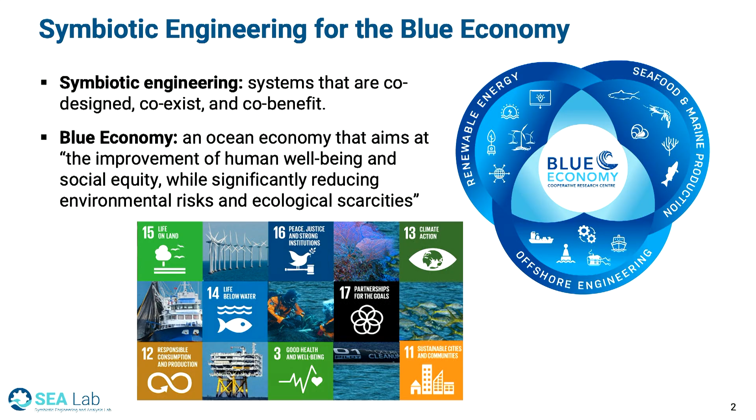From a research perspective, we take this and think about how can we co-design and optimize offshore systems to address a lot of these critical sustainability challenges. Specifically, we look at how can we harvest sustainable energy, how can we harvest water and food, and then also how can we design marine robots to support all of these systems.

And the motivation is clear. The ocean covers 70% of our planet, and it's rich in these resources, but it's a harsh, dynamic, and expensive environment to operate in. So to be sustainable, our systems must be multifunctional, resilient, and resource efficient.

And the challenges of all of these systems are similar. They must handle stochastic ocean waves. The waves change in frequency, amplitude, direction all the time. There's often a strong coupling between the physical design of the system and how you operate or control it. And you have to balance these competing goals, not just cost, but sustainability increasingly.

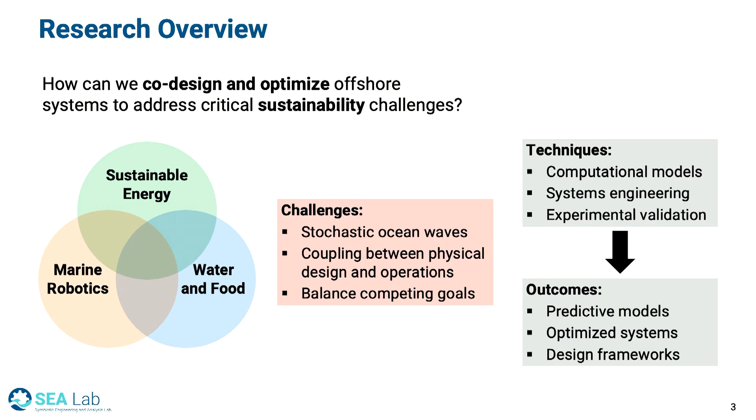So the challenges of all these systems are similar, and to overcome them, my group looks at how we can do that using computational models, systems engineering, as well as experimental validation. Our goal is to come up with predictive models, optimize systems, and more broadly, design frameworks that we can use for this new economy going forward.

One of the biggest challenges is that these offshore systems are really coupled. And what I mean by that, I'll use an example of a wave energy converter to talk about that. So these are two types of wave energy converters I'm showing here.

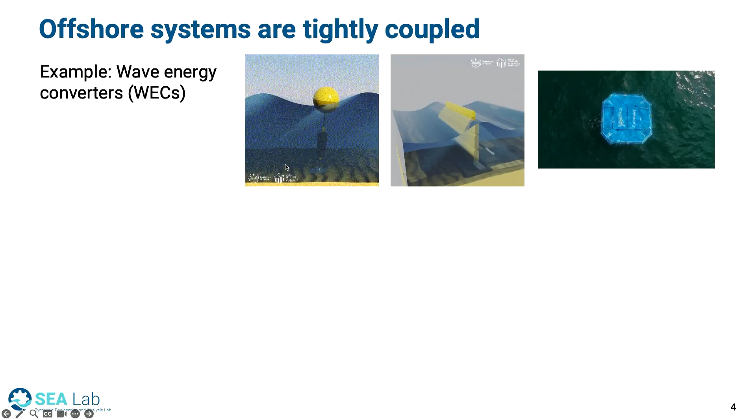The first one moves up and down in heave. It's known as a point absorber, and it extracts energy from that heave motion of the waves. The second one is an oscillating surge WEC. It extracts motion from pitching that occurs when the waves hit it. And the one all the way on the right, that's actually a point absorber that's been deployed in the ocean by a company called CalWave. So these things are actually being realized right now.

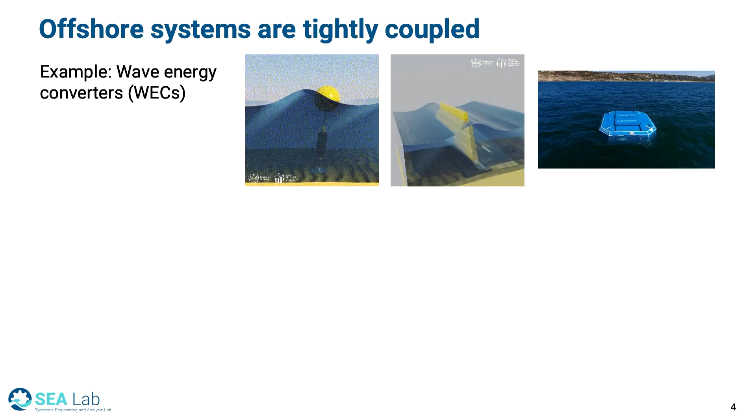Wave energy converters are extremely coupled systems. If we look at the different disciplines that go into a wave energy converter, we have things like its geometry, hydrodynamics, which is how it responds to ocean waves, its powertrain or PTO system, control, and structures. And all of these are tightly coupled.

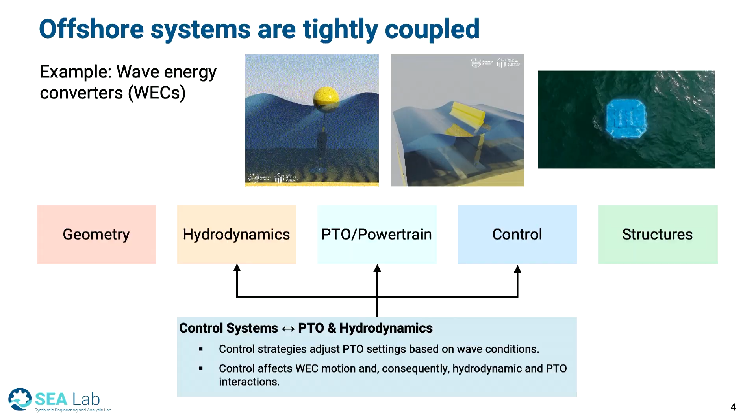For instance, the hydrodynamic performance is impacted by your choice of powertrain, because of the forces that the powertrain enacts on the energy converter, and the hydrodynamic response influences your powertrain's ability to extract energy efficiently. There's also a coupling between the control system and the PTO and the hydrodynamics, as well as the hydrodynamics and the structures that you need to now build to handle those ocean forces that you're undergoing. And finally, also the PTO forces need to be accounted for in your structures.

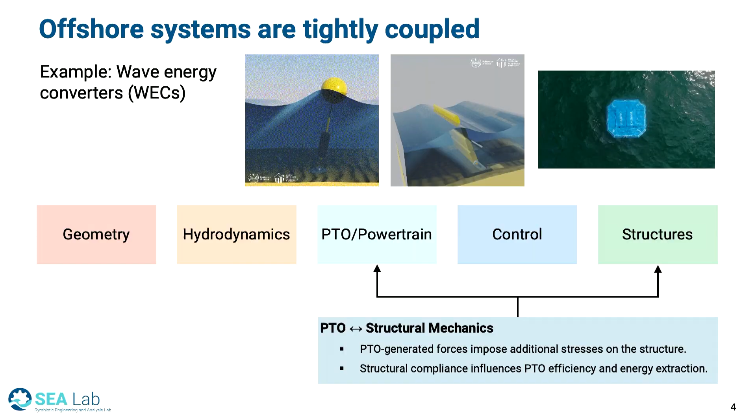Traditional WEC design took a very sequential approach. We might first consider the geometry of the system, then think about its hydrodynamic performance, look at how we design the structures to handle that hydrodynamics, slap on a generator to extract that energy, put a controller on at the end, all with the goal of maximizing power.

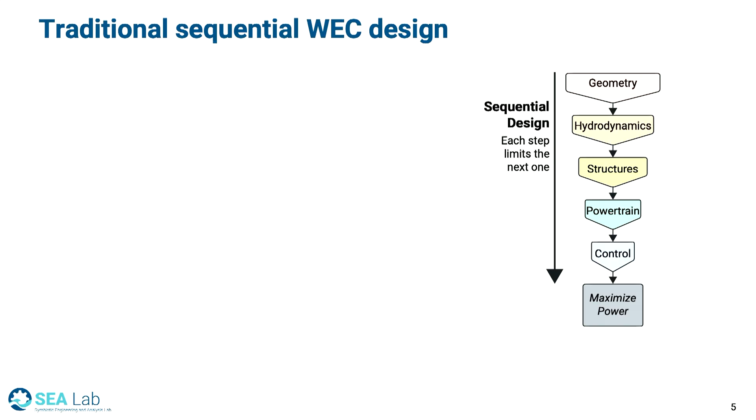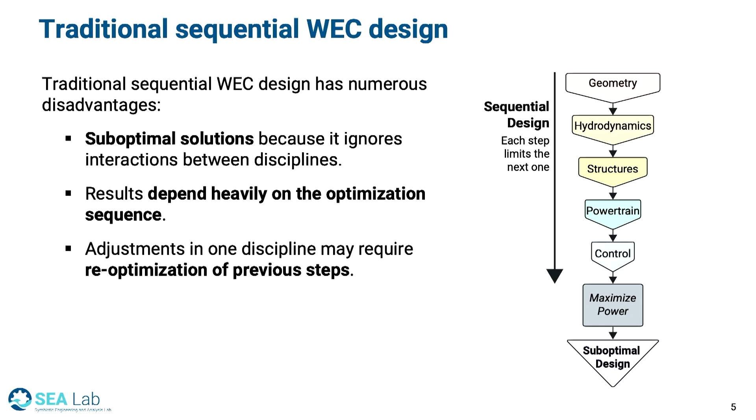But when we do this, the decisions made in a previous discipline limit our design choices in the next one. This causes us to reach suboptimal solutions because we ignore these interactions between disciplines, and the results depend heavily on the optimization sequence. Any adjustments we make in one discipline may require re-optimization. So it's very challenging in this way.

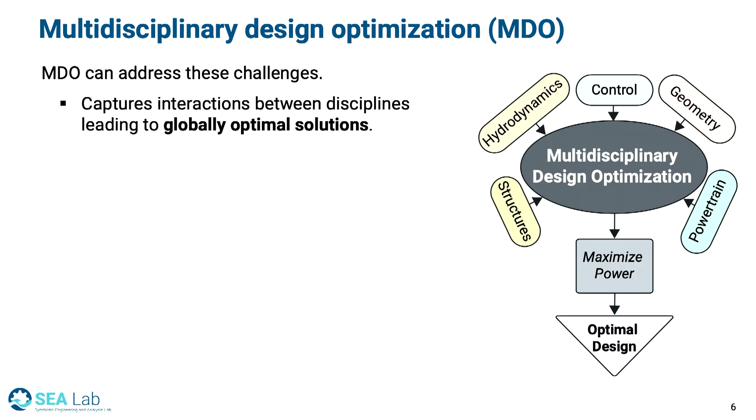In my group, we see multidisciplinary design optimization as a tool to address these challenges. Instead of considering the disciplines sequentially, we consider them simultaneously with the goal of, let's say, maximizing power. This allows us to capture the interactions between disciplines to get globally optimal solutions and reduce the need for iterative adjustments.

Another way to think about this mathematically: if you were to optimize for one discipline and then a second discipline, you might reach a local optimum for sequential design. But if you could view the entire design space simultaneously, you might get the MDO optimum, which is very different. We see this as a way to bring more design freedom into the design process earlier for longer. That's really our goal with MDO.

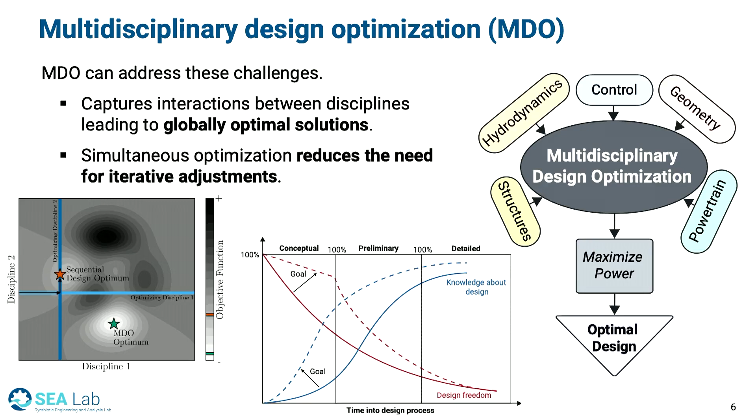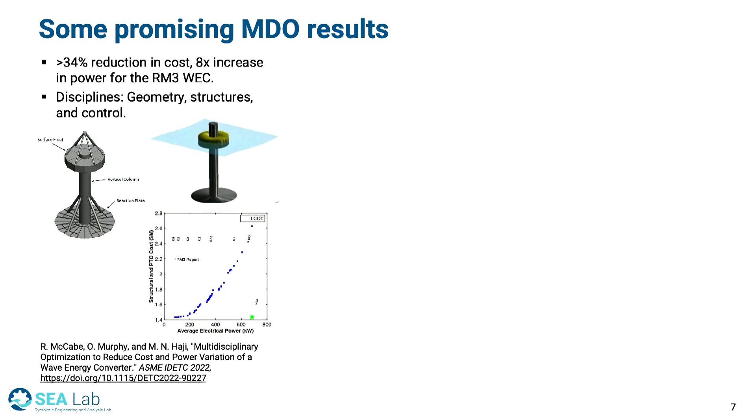We've had some promising results in our group trying to apply this to these ocean systems. We've done some work on the design of a single wave energy converter, and doing this, we reduced cost and increased power when we considered geometry, structures, and control simultaneously.

We've also looked at wave energy systems that can produce pressurized seawater for reverse osmosis. When we apply MDO, we can drastically reduce the cost of water produced by these systems when we consider hydrodynamics, system dynamics, desalination, and economics.

And we've even looked at how we might site these systems, specifically looking at wave-powered aquaculture systems. So now we bring in biology, the farm size, the wave energy converter, and location, and we can find optimal sites.

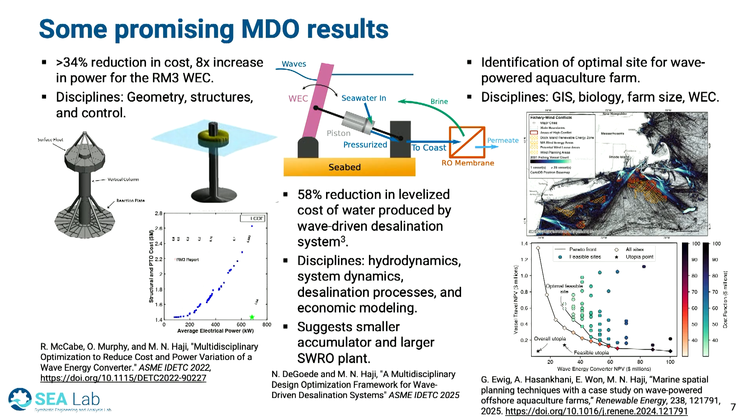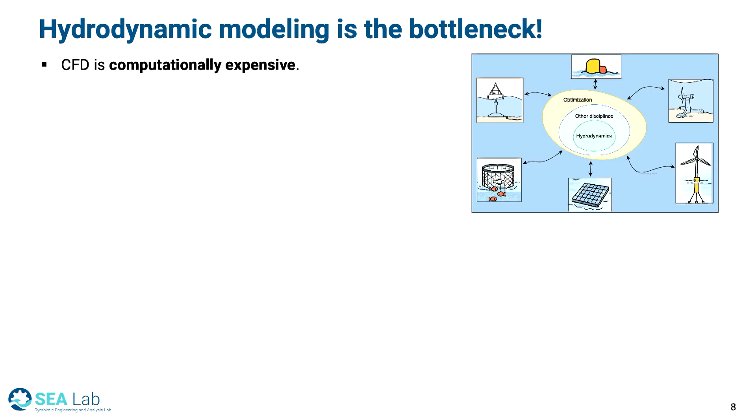But with all of these systems, we were finding that modeling the hydrodynamic performance was really the bottleneck for this kind of optimization. You can model the hydrodynamics using computational fluid dynamics, but that's very expensive computationally, so you would not try to do optimization that way, because design optimization requires running simulation hundreds or thousands of times, and that issue is compounded when you consider multiple disciplines as we do in MDO.

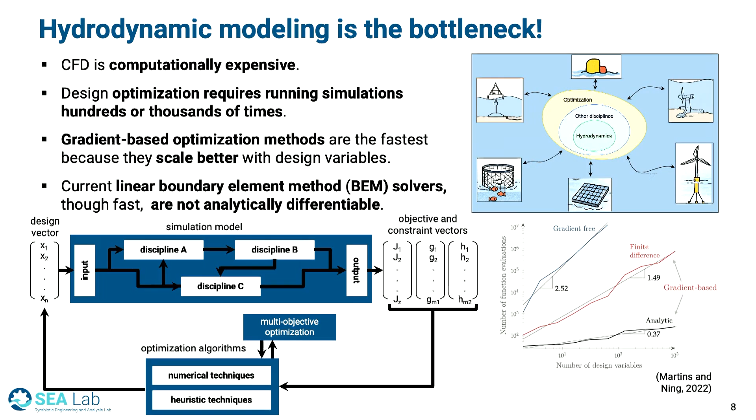The complexity just increases. At the same time, when you think about optimization, you really want to leverage gradient-based optimization methods because they're the fastest and they scale better as you add design variables. But the challenge is that other solvers, like linear boundary element solvers, which are much faster to run than CFD, are not analytically differentiable. So this poses a challenge to MDO.

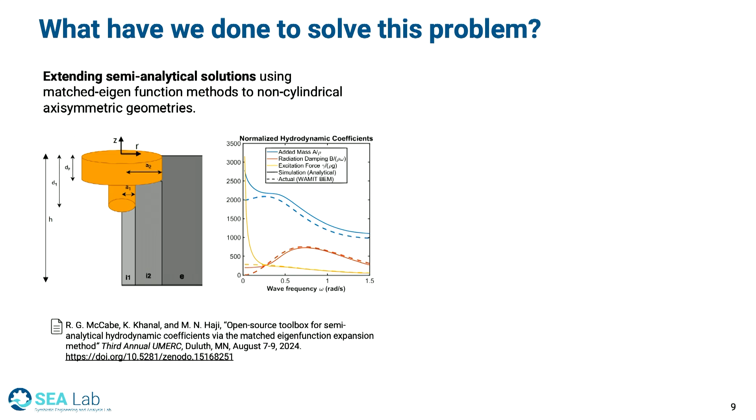So we've tried to tackle this problem with a couple new tools. First we asked, okay, can you get by with an analytical model for the hydrodynamics? We've done some work on that, and we're working on semi-analytical models for hydrodynamics that are 30 times faster than boundary element methods, and they're differentiable.

We've also completely rewritten the boundary element method to be differentiable, in collaboration with Sandia, and this code is available now to download in a tutorial if you're interested. Now with this analytical differentiable BEM solver, we can handle a wide variety of geometries and allow gradient-based optimization.

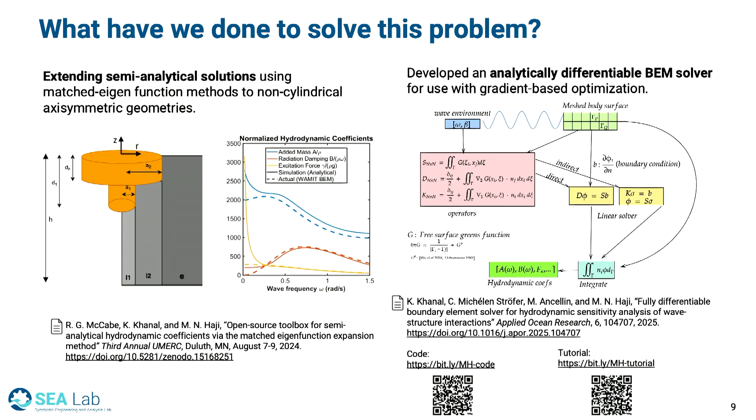And if you have gradients, I start to think that AI starts to get a lot more interesting, whether that's data-driven methods for AI, or using neural networks that require sensitivities throughout the design or simulation. So I start to think, what's next, and can AI responsibly help?

Well, for all of those offshore systems that I talked about, I see different groups of typologies come about: systems that talk about renewable energy, systems that extract resources like hydrogen, systems that are hybrids between these, and even mobile systems like robotics. So could AI help for design representations across this broad landscape of typologies?

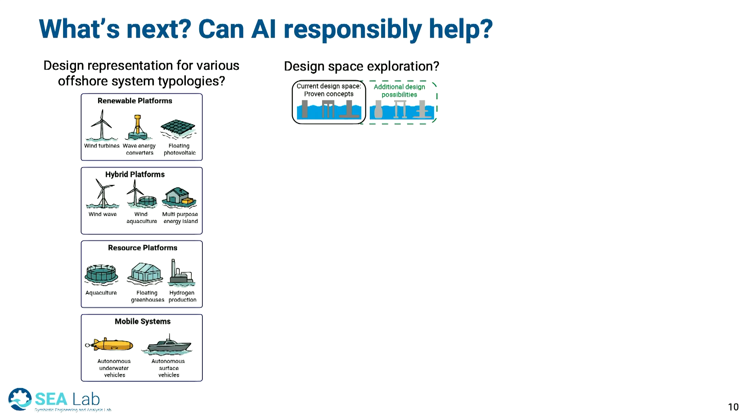Could AI also help with design space exploration? I'd love to be able to probe more organic designs to see how they would perform in an ocean setting. Could AI help with that? And then could AI help with the design analysis and optimization portion, which I think has received probably the most research, allowing us to rapidly iterate between these designs and consider new designs and new deployment locations.

And finally, could AI help us with evaluating design metrics, especially tough ones like reliability and maintainability, all of these that become increasingly important in an ocean environment where we cannot physically go to our structure and test it out, and it really needs to be self-sufficient.

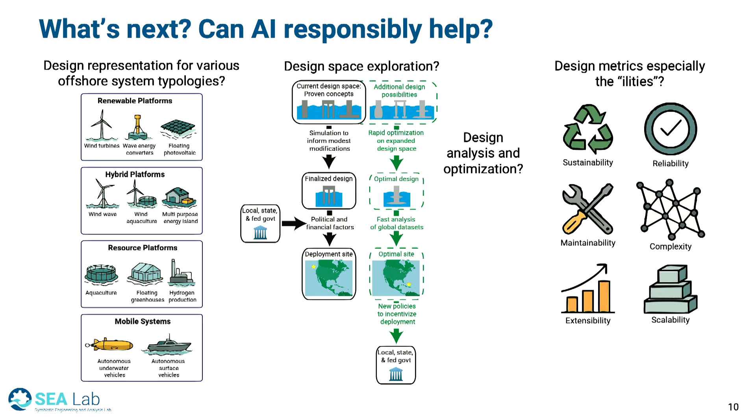So I want to leave you with those questions, and I'd love to hear your thoughts. But if you're interested more generally or are doing work in the space of ocean systems, I also want to highlight...